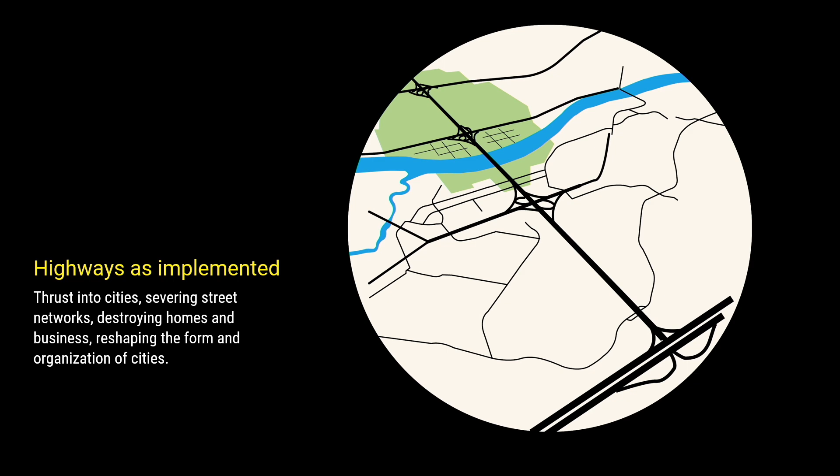The original intention of the interstate system was, as this image shows, that the interstates would link cities together, but would not route through them. Instead, the highways would stay on the periphery of the urban environment and diffuse into the local street network, being context sensitive to the area the streets were in. But as we know, that's not necessarily what happened. As implemented, the highways were built on the outsides and into the cities, creating massive interchanges, huge land needs, and severing and destroying thousands of neighborhoods across the country.

Well, what happened? Dwight D. Eisenhower, who signed the Interstate Highway Act into law, later regretted part of the decision. He said that was against his original intent. He went on to say it was against his original concept and wishes, and did not love that his name was attached to the legacy of the interstate highway system.

But, as we know, the highways were built. So, what happens now? No city was left unchanged by the interstate highway system. City images were changed, city form was changed, the nature and relationship between land use and transportation was forever changed. But today there's this opportunity, and it's called highway reimagining.

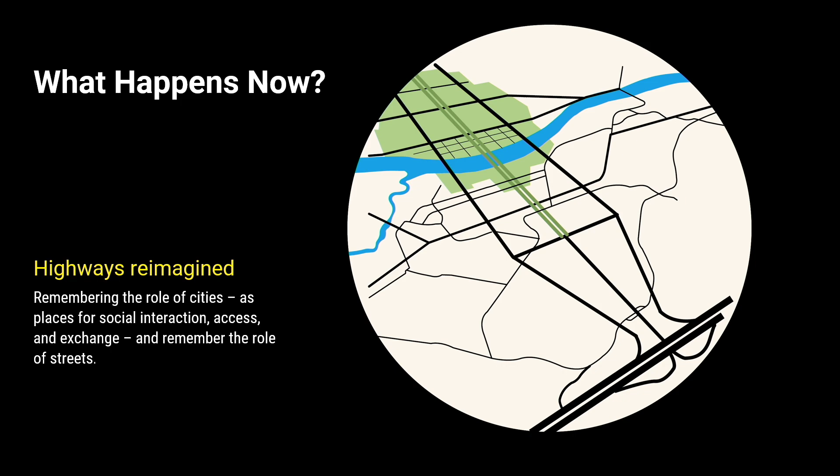So what happens now? Well, what Ian was mentioning, what we do as a firm, is we help communities reimagine highways. And the question presented tonight is what does that look like? This is just a graphic that shows you can rethink these highways as something different, as something context sensitive, that is more closely related to the original intent of the interstate highway system, so that these paths are not just conduits for fast-moving cars.

And it's also important to note that as soon as the highways went into these cities, people have been trying to get them out. The movement started small, but it's been going on for decades, and it's gained success and had a lot of setbacks.

I think, Ian, you've personally been involved in about 35, 36 different highway reimaginings around the country over the past 3 decades. So Ian's had a hand in a great many of these.

But for many of us, the moment came here with the Every Place Counts Design Challenge. That was the US DOT in 2016, the final year of the Obama administration, had this design challenge that happened in 4 cities to help these communities reimagine what the highway had done to bifurcate their neighborhoods, and ask the question, how could changes be made to reconnect those communities? It was the first major admission by the US government that highways actually did harm to these communities.

And what was also going on in the background for several years of advocacy work is an organization that I used to work at and was involved in, the Congress for the New Urbanism. They have been tracking highway removals for the better part of 2 decades now, putting out a biannual report, Freeways Without Futures, that lists the top 10 highways that need to go in the United States. But they've been tracking these efforts since the 90s.

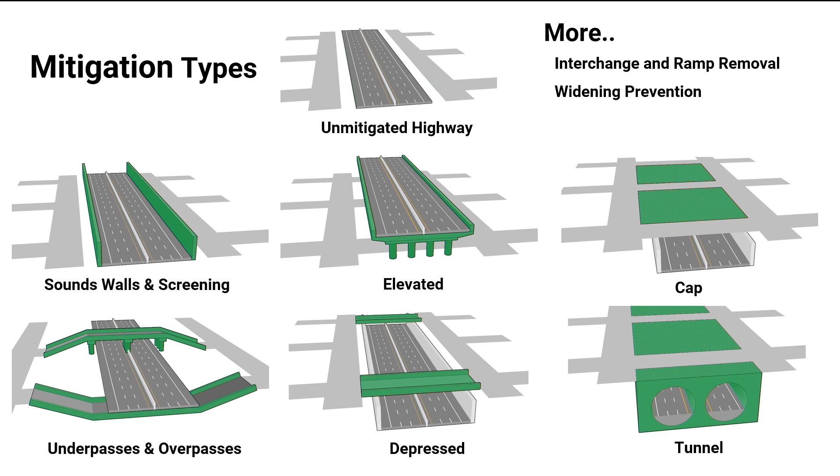But I think it's critical to know that the answer to the question of is it removal or is it mitigation is: is the highway still there? Because if it's still there, it's just mitigated.

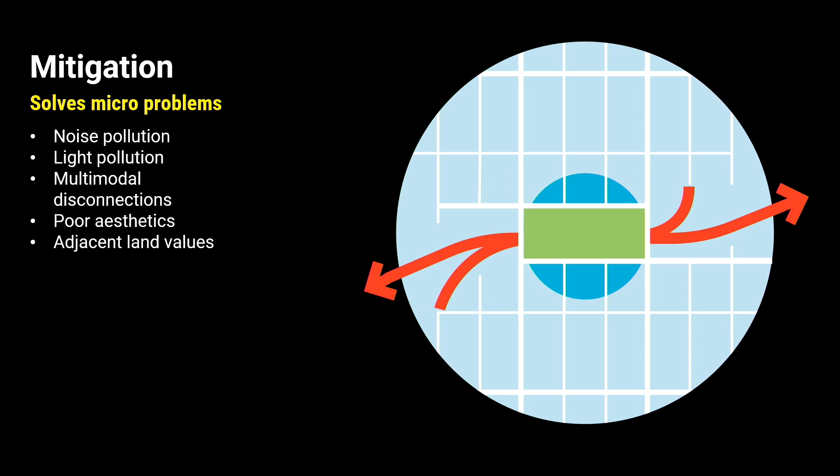And why is that important? Well, mitigation solves micro problems. It solves problems just in the small area in which the mitigation is happening. Those include local noise pollution, light pollution, maybe disconnections for bus and bikes and peds. It might fix some aesthetic issues and might help increase adjacent land values, but you still end up with a highway on either side of the mitigated issue.

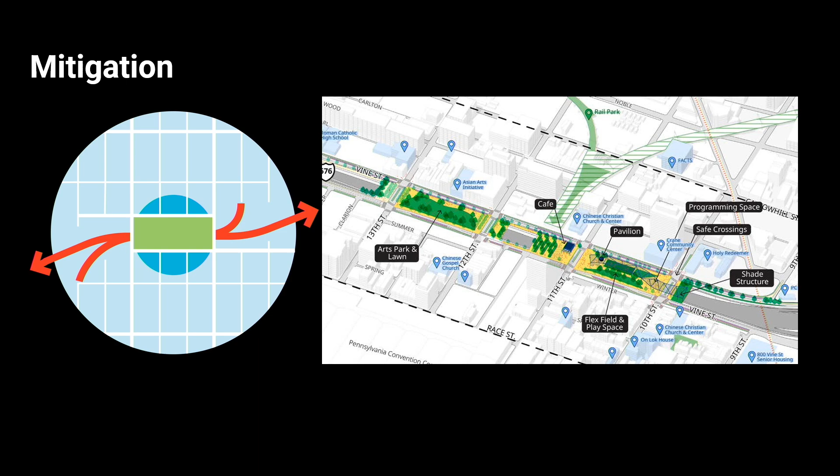So that can be great in certain places. It's not generally what we advocate for. That's what you're seeing here with the CAP in proposal for the Vine Street Expressway in Philadelphia, if any of you are familiar. But removal or reimagining the highway goes several steps further.

It solves macro and micro problems. So what that does is it changes things like city form and city image. What does your city, what does your borough, what does your town, what does your community want to be? Removing the highway, reimagining what it can be, can change the entire image and trajectory of a place.

And I want to give you a few examples. So this is Rochester, New York.

You're going to hear several examples tonight. This is just one. The removal of the inner loop dates back to the 1990s. It was actually written into the 1999 comprehensive plan, the Renaissance plan for Rochester, New York. They understood that the traffic volumes on the highway did not necessitate the need for a highway, so they put it in their plan. They said, we are going into the 21st century, it's 1999, what do we want to be? We don't want this here anymore. So they planned. They didn't have the funding, but they had the idea.

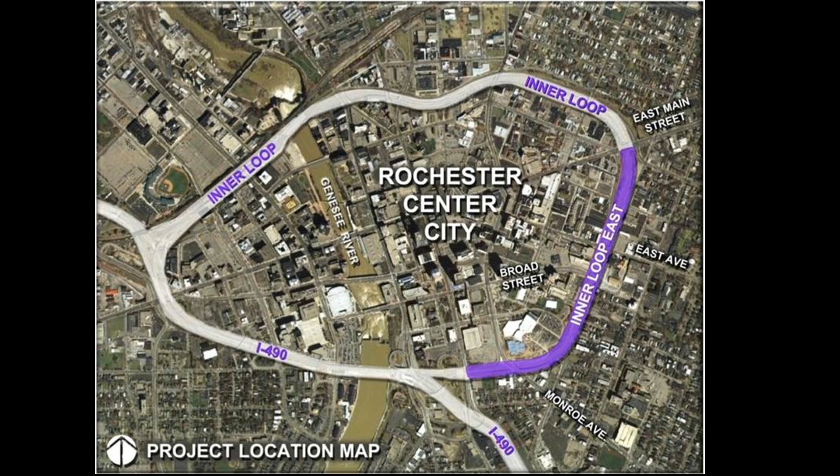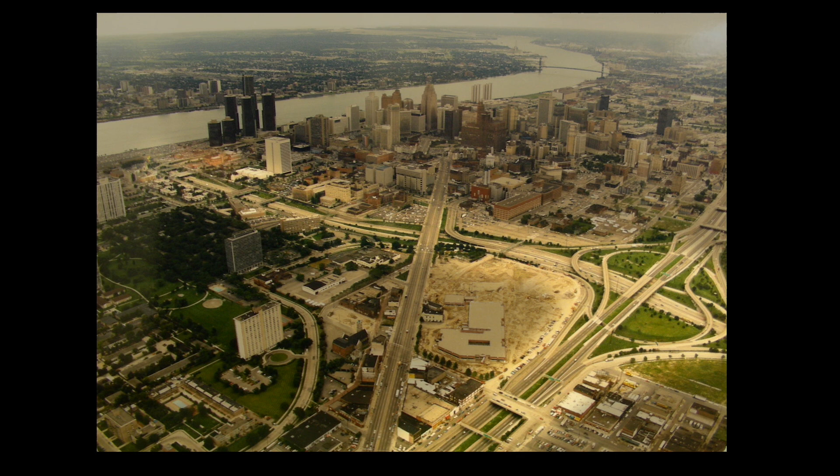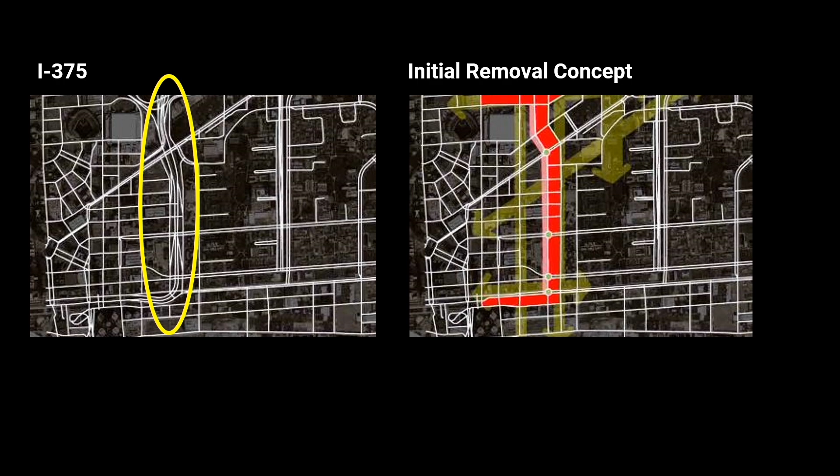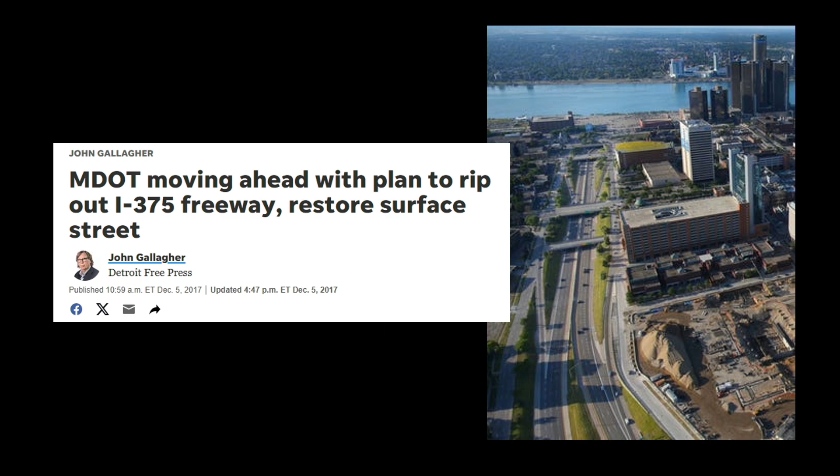And the idea to remove this stub of 375 and restore the relationships started to become popular. In 2017, the Michigan DOT heard the cries of the community saying we want something done with this, and they decided to move ahead with ripping out I-375 and restoring a surface street. And it's important because this is all happening in the backdrop of Detroit coming back, the vibrancy of the city being restored. It's seen this major renaissance because it's doing all the things it had done before the highways went in: investing in people and places, transit, art, multimodal connections, joy, and health.

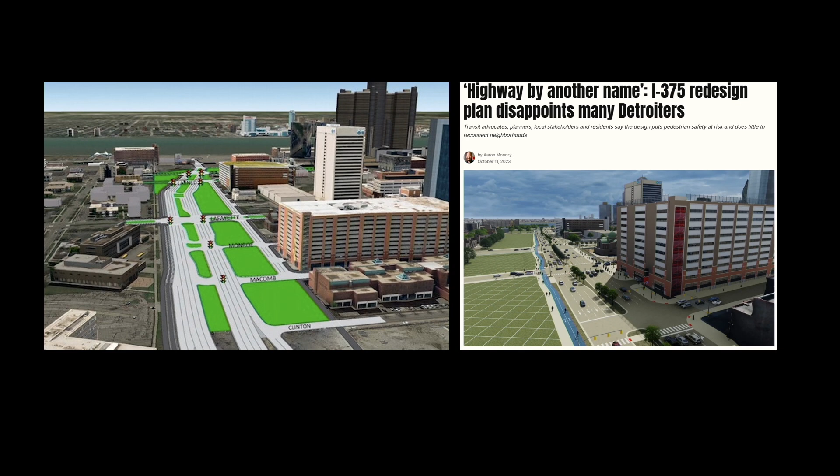It's not all great. The plan by the DOT, imagine that, a group of engineers planning, taking out a highway, they still didn't quite get it right. The community was pretty unhappy with what the city of Detroit, with the Michigan DOT had put forth. Some quotes from concerned citizens: What happened to restoring Hastings Street? They're replacing a highway with a big arterial road, which is also a barrier.

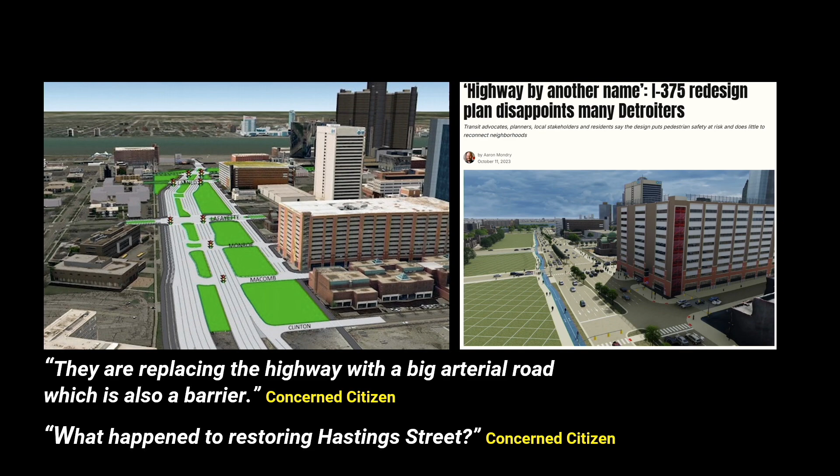But there's something to be said about applauding the DOT. When your dog quotes Shakespeare, it's not correct, but it's not cool to correct his grammar. So it's a major admission that the DOT is doing the right thing and removing this highway and allowing the communities to reconnect and reimagine a different future for the city of Detroit.

And in fact, we have been helping them with a peer review of their plan to make it even better and to hopefully produce better outcomes for the city of Detroit. And one of the last things I'll say is this is all happening in the background of, remember how I mentioned that the US DOT made this admission that highways were a problem?

Now the US DOT has something called the Reconnecting Communities Pilot Grant Program, which maybe some of you have heard about, and they've pledged over $1 billion for highway reimaginings and similar efforts to reconnect communities and address the barriers caused by infrastructure. So there is money behind this, there is backing by the federal government, there is this understanding that now is the time to be thinking about reimagining these spaces.

Before I pass it over to Cindy, what I want to say is that the decision to reimagine 322 is not a technical feasibility issue. We all know it's hard, and we know it can be done. It has been done, and it's going to continue to happen in communities all across the country. But also, just like those other projects I shared with you, it must be a community-driven decision. So I'm going to pass it on to Cindy.

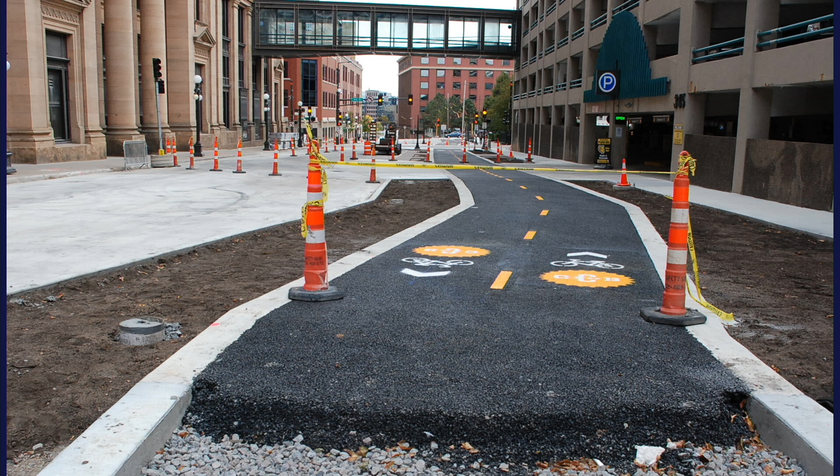Certainly there are reasons they were doing that, but it was really a bummer to me because it really completes that trail for me. It certainly has a function. It's actually a structural detail to keep an asphalt trail from sloughing or eroding at the edges, but it also adds to the feeling of completeness, to the placeness of that trail. It's still largely a place to move through, but the feeling feels different. A typical trail feels a little quick, kind of slapdash, but when we add that detail...

That was the idea behind Path as Place. It was a powerful experience to me in my work as a landscape architect in transportation and mobility, and it led me to this idea of Path as Place. I think we can define any path, a road, a street, a trail, a track, a highway, even a route, any linear feature, as through its design and composition, is all or part of a place - a defined area, a location, or a space within a built or natural environment.

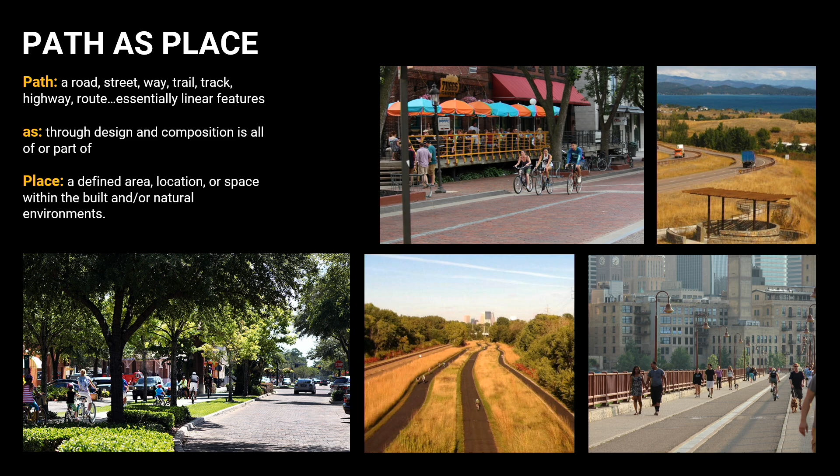That's the idea behind it, and it's been helpful for us as we work within communities to talk about it in that space, because we all know and love places in our communities, and it's about bringing that sort of sensibility and attention to detail, even at any scale, so it happens when you experience it. It can happen in a variety of scales and different contexts.

This old elevated rail becomes a place in New York. If you've been here, it's a wonderful experience on the High Line. Bikeways through, again, detailing - this one's profoundly memorable, as is this one. Again, just that sensibility to really crafting the space.

Even a highway - I'm not suggesting this for 322 at all, Ian will share some great ideas there - but this highway, Paris Pike in Kentucky, becomes a scenic and memorable experience because of how the paths, the road, work with the topography. They respect the landscape and capitalize on the view sheds. Certainly not appropriate for your context, but I think it's another example of a path as place.

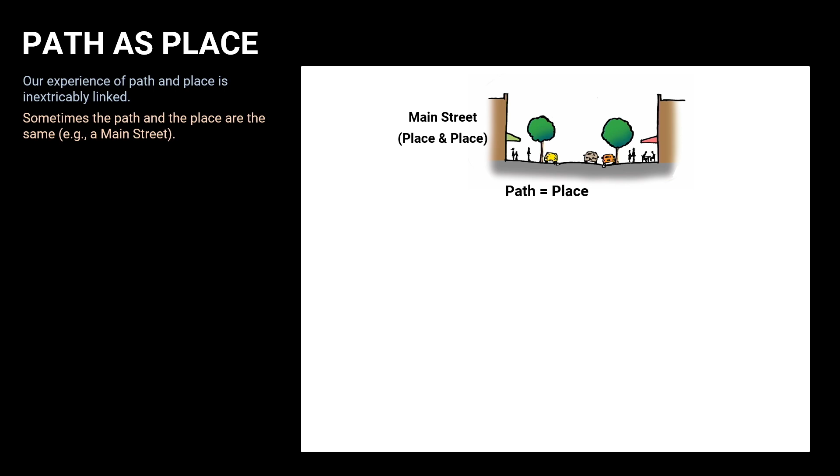So generally what we often talk about is our experience of path and place are really inextricably linked. Sometimes the path and the place are the same, such as a main street. These are some fun cartoons that Ian did for this idea. And sometimes the path really contributes and supports its place, a street in a downtown or adjacent to a parkway or a waterfront.

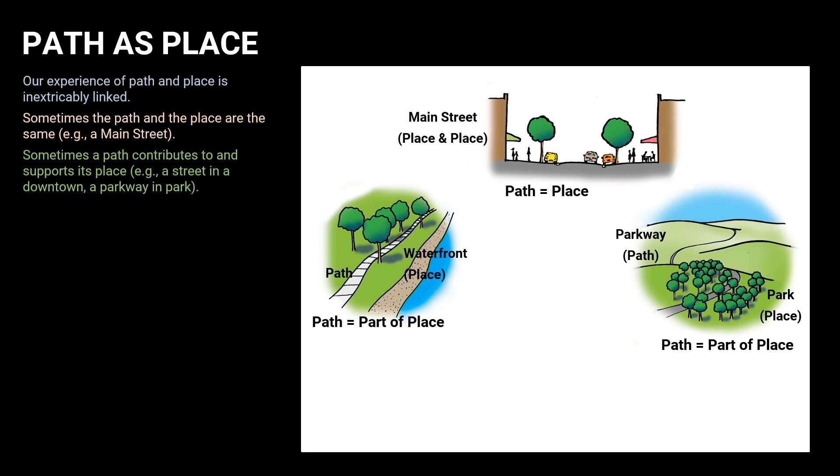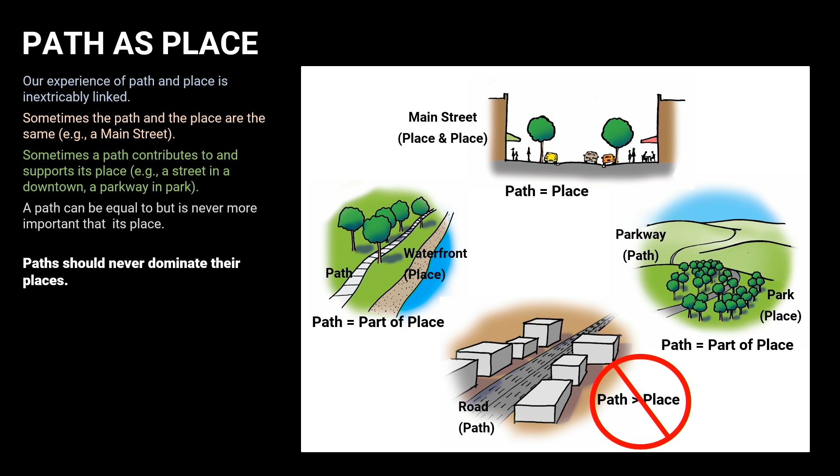A path can be equal, but is never more important than a place. As we see in the bottom, it should never dominate that sense of place. And when it does, it really deteriorates the sense of community and that sense of enjoyment in that space.

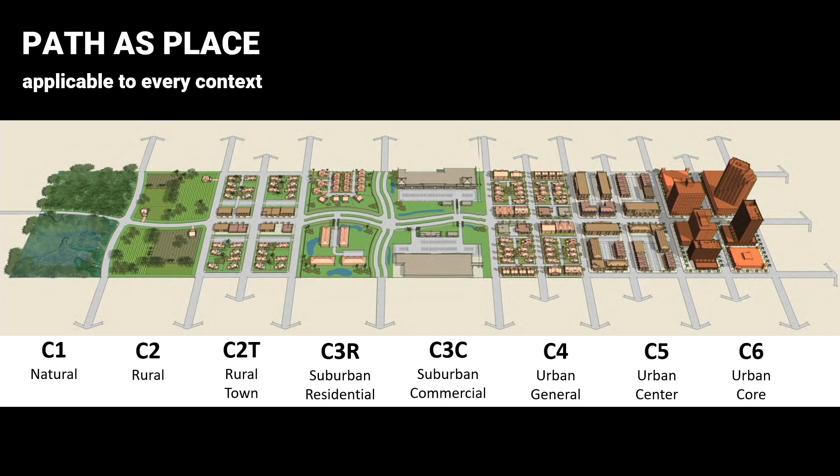It's certainly applicable to every context as well, so it can grow from a real urban idea to a natural one. Of course, that's going to look different - path as place is going to look different in different contexts. So how can we design, not engineer, the right solution here? I think it doesn't mean engineering isn't part of the solution, but that we need to work together. I don't think there's a singular discipline that has the solution, but rather it comes from an approach.

And if we conceive of the context as place, we will design these spaces differently. I actually came across this article not long ago - Dan was a part of this. If you haven't read it, I really recommend it: Roadways and the Land, the Landscape Architect's Role. This was actually from the year 2000, but it so resonated with me, and I wanted to share this aspect.

I do think the role of the landscape architect is perhaps a missing link in the current solutions. This article goes on to say that landscape architects must develop well-defined aesthetic rules to complement the very well-defined structural and engineering rules, and this is certainly likely true. But I'd also offer it's about an approach, how we as landscape architects think about space.

There are three components I'd like to share with you about how we think about space and what might happen with 322: the ideas of curation, of culture, and of choreography. The idea of curation is the act of forming an experience through the selection and organization of elements. Think of a museum experience, a park space you love, even the grocery store - these experiences are highly curated for you to have the right experience there.

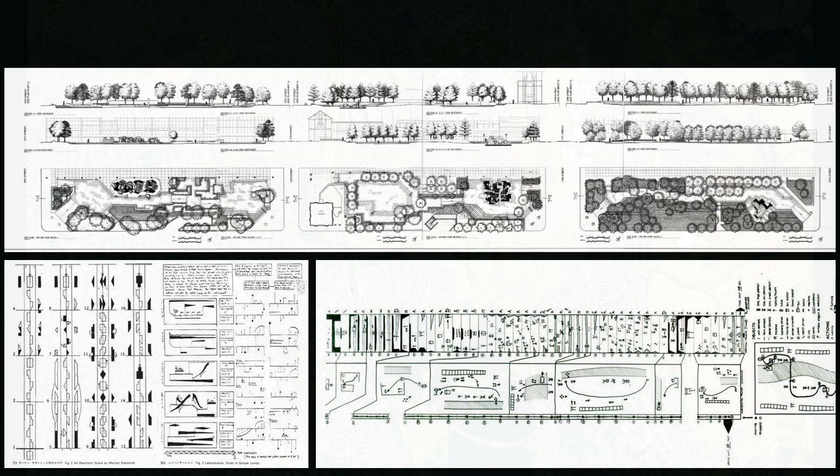I think for a transportation project, these are just fun diagrams by Lawrence Halprin, landscape architect that I love. He designed this space up above, but sort of talking about the sequence of space and the kind of idea of how he wanted people to experience his landscapes. And I think it was a real nice rhythm that he created. His wife was also a dancer, so I think he was very inspired by her as a choreographer as well. So something to think about in your space: how are you choreographing that along 322?

The last thing I'll do is share with you a project we're working on. This is near my neck of the woods out in California. You can kind of see, there's a highway here. And you can just see they really, really wanted to connect this all the way over to a highway here, and Caltrans started to buy up this land. You can see actually where they're going to put some interchanges here.

The city and the community really fought that, but they had already purchased some of that land. It's been sitting like this for years, many decades, since Caltrans started buying up the land, and they've actually now given the land back to the city. It was homeowners who lived here, but now it's back to the city, and so they've started to develop this parkway concept. We're working to help them reimagining this space, and this is the parkway here that they're going to connect. Perhaps debatable whether it's the right solution, but I think what I want to mention here is that it is going to connect to two parks. A parkway was originally meant to connect two parks and then have a park-like experience through it.

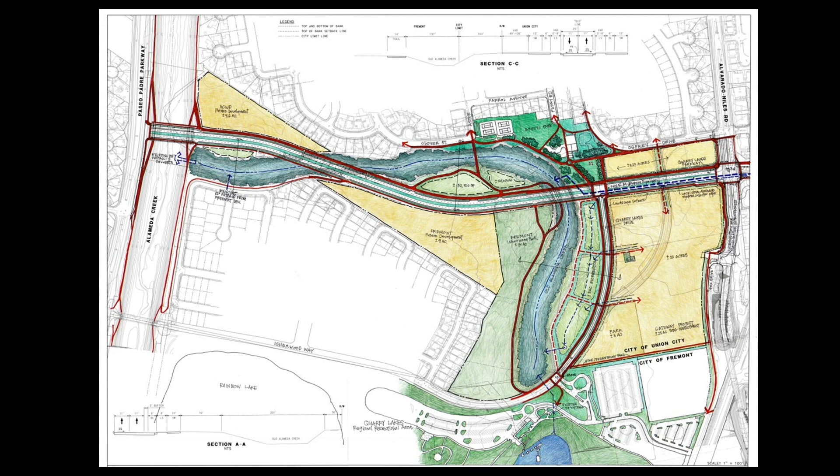So in this instance, creating a parkway versus a highway, a much smaller road leaves such wonderful opportunities for other things, like creek restoration. We can address water quality in this, future housing opportunities that we are sorely in need of, multifamily housing in that area. So it really has presented a wonderful opportunity. If this had all been an interchange, it would be a really different experience for this community. Another way to look at it, in cross-section, is how we're allowing for multiple functions in this space: a wonderful creek restoration, places to inhabit, and transportation certainly is within this.

Mobility is within it, but it's not dominating the experience. The parkway over here is not a barrier.

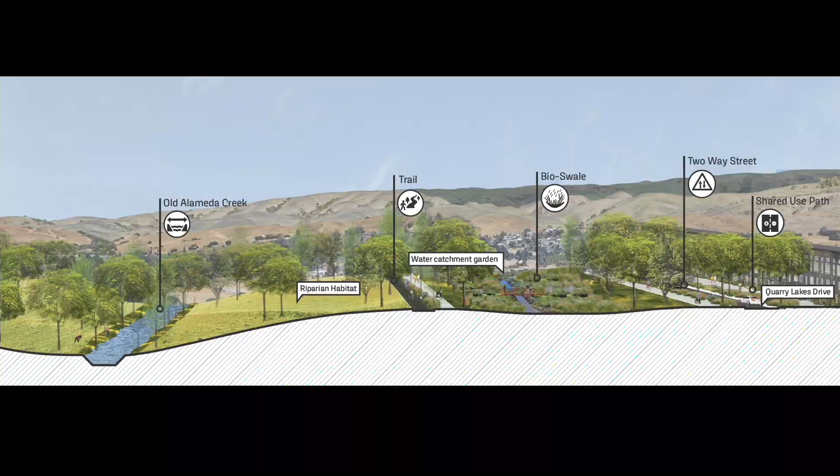So this is what it sort of looks like in some of the renderings. We have been really focused on the design of the trail system, which in this one looks like it just goes straight as a bullet, but actually comes through and meanders into some of this area. And then some of these other spaces, this restoration, creek restoration, and also the park spaces along it.

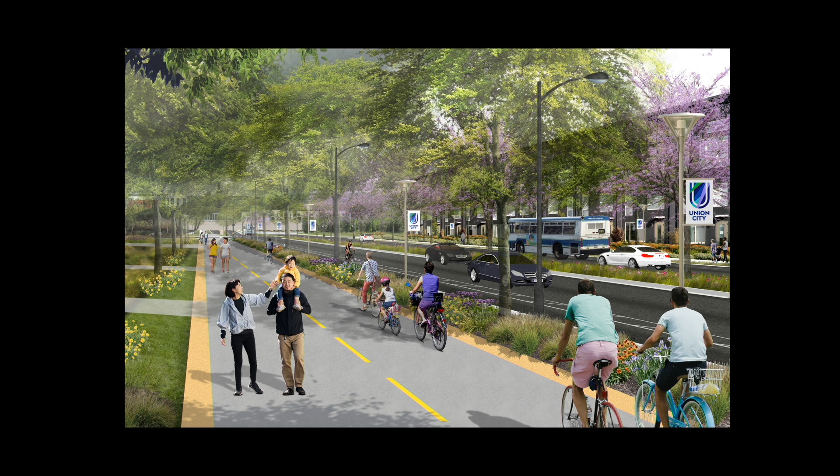And the transportation system is certainly part of it, but walking and biking isn't an afterthought. It's not just accommodated, but it's celebrated.

So another quote from that wonderful article that I mentioned earlier, and I think this is really an important one. Three mentalities should be gathered around the drawing board: one should be creative and aesthetic, the second analytical, and the third technical and practical. If these three mentalities do not exist in a single mind, they must always be present in terms of absolute equality in the group or team responsible for design.

And I think that's so critical when we're thinking about our roadway systems and how they really work within our landscapes. So I would offer an addition to Alex's thoughts. As he mentioned, we know it's technically feasible to reimagine some of these highways, but it must be community driven. And if that path-as-place approach were employed, what would the solution be? So I'll hand it over to Ian.

Thank you, Cindy. Okay, so what I'd like to talk about is both the part of 322 that's in town and also the rural part to your east.

And I'm going to start with some stories from other places where we work. I'm going to go over the battle we had over Virginia Route 50. This was my very first highway reimagining project, which started in 1995.

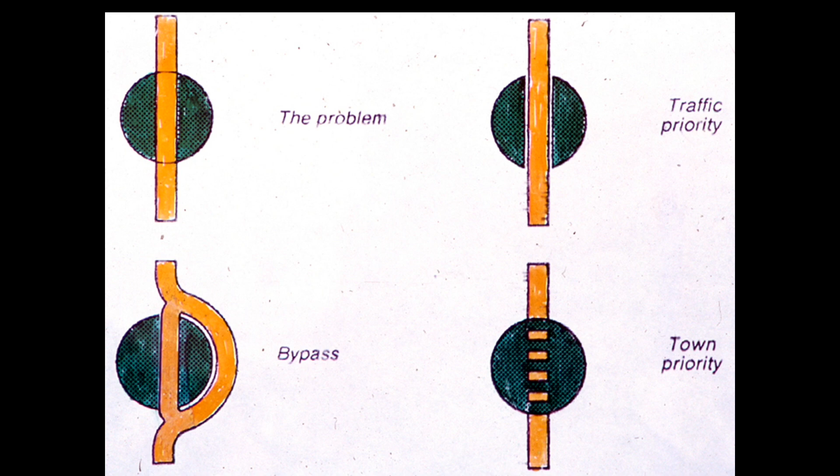So we suggested this, the community and I, to the DOT, and there was this oversized negative reaction against it. It was not just no, but they were viscerally saying no, absolutely not, you have to have a bypass. We were wondering why, and we kept pushing because it seemed like a really great idea. It works all over Europe—for about 20 years it would work here.

What we learned was that the DOT wasn't there to help the three little towns with the safety on their main streets. They needed these bypasses because there was a plan that wasn't public to build a giant freeway from Washington to West Virginia, and it happened to go down Route 50. They needed the right-of-way. That's what this was about. It wasn't about safety, it was about building this giant highway that Senator Byrd from West Virginia had championed.

His economic development plan for West Virginia was to build this giant highway so that he could build tract homes, low-density suburban homes in West Virginia, and that would help his economy. People would then drive all the way through Virginia to get to work in Washington D.C. every day, morning and afternoon. That was his idea of a great idea.

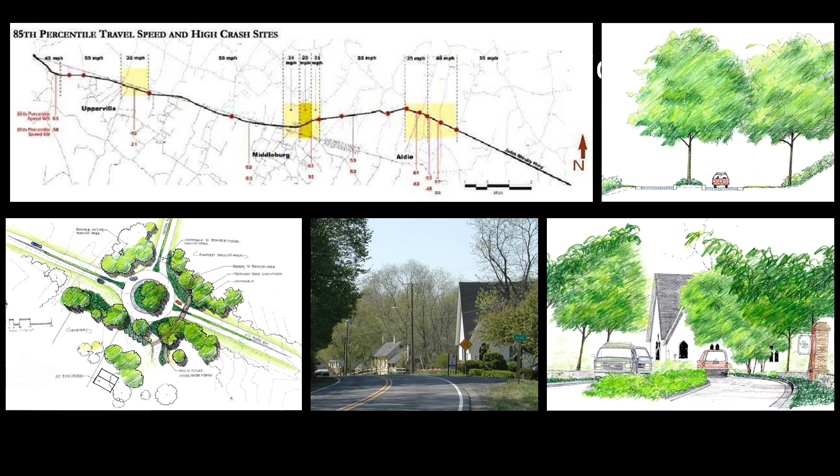So we'd preserve the rural road and have town-friendly speeds when the road got to towns, so that the towns wouldn't get divided. Different cross sections: this one was for where there was a left turn, so we developed a beautiful median with an opening so people could turn in and keep the aesthetic and the look that everybody wanted. This was one of the main towns with an entry sequence at each end and a slower speed through the town.

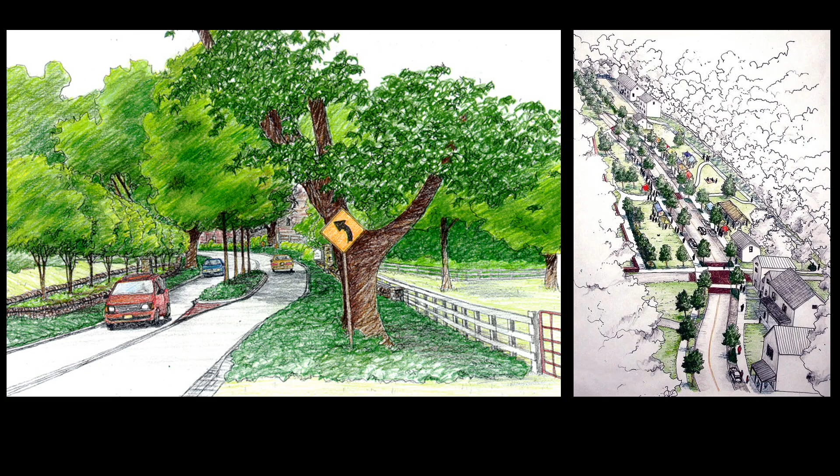So all of these plans came together, and the fight continued. It was a vicious fight. We got federal funding for this, and they did everything they could to kill the funding, to use it for other things. It lasted for years, and we eventually won.

But it wasn't a technical decision, and Alex went over that a little bit. It was political. Eventually, because the DOT could not say yes to the community, because they were charged with building this highway. So it didn't matter what we said, they had to keep pushing their agenda.

And it eventually went to Senator Warner in Virginia, the older one. Some of you might remember him, he was a very powerful senator. Also Senator Graham in Florida helped support that, because we were doing another equally cool project in Florida at the time. And so they decided that the giant highway was not happening, and that this context-sensitive landscape preservation project would happen. So 29 years later, the project has been an enormous success.

VDOT now uses it as their poster child for context-sensitive design, and the traffic volumes haven't changed.

This is an important point, because when I arrived on the scene in the 90s, the traffic forecasts were saying that traffic volumes were going to double. They had this modeling that said traffic volumes would go up, and so we had to build bypasses to accommodate the additional traffic. Looking back, the traffic forecast from the 70s said volumes would double by the 90s, and they hadn't changed. The 80s forecast said the same thing, and we weren't halfway there. So we figured the only way the traffic forecast could occur is if the highway was built.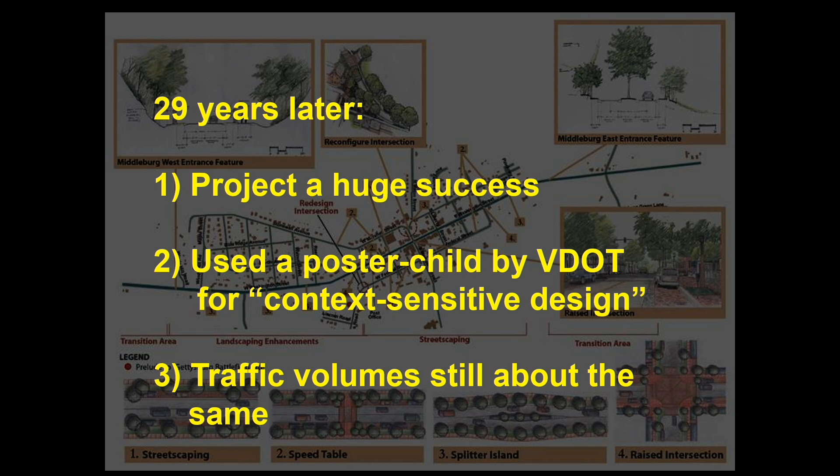It should be your vision, because traffic demand forecast models are only one version of the future. If you decide to lower your traffic volumes, you can, by making changes. I want to guarantee to you tonight that traffic volumes are not an incompressible fluid in a pipe that has to go somewhere. They're malleable. They can go up depending on what you do, and they can go down depending on what you do.

So this is another project, in Chattanooga, Tennessee. This is the river, that's the downtown, and they were trying to revitalize it by building an aquarium. But the downtown wasn't very walkable. They thought, hey, if we build an aquarium, people will come downtown and stay for lunch. Well, people would drive downtown, go to the aquarium, and then drive out. It wasn't a place. One of the problems was they weren't connecting to the waterfront, this lack of connection.

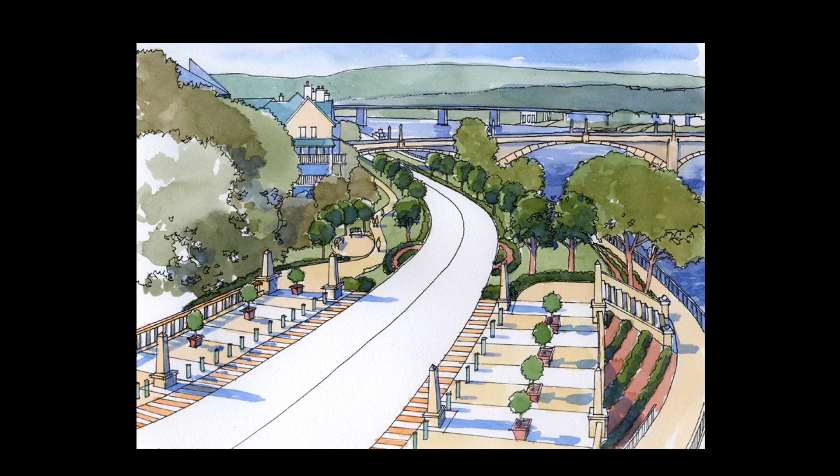So we thought, well, why don't we just change that big road into a 2-lane street and create steps down to the waterfront, and that would really help the downtown have an address.

Now, the Tennessee DOT at the time — they support what happened afterwards, but at the time they said, hell no, you can't do that. The city's lifeblood is the highway, and the mobility it provides is so important for the economic health and convenience of the motoring public. We have to fight congestion, so we shouldn't take the lanes away. We should add lanes, because removing it is simply anti-progress.

And the city, the community, was saying that walkability and access is more important, and that's key to the economic and social health of the city. The highway is context insensitive. So two completely different paradigms, two different ways of looking at the same situation. I'll go into that in a little more detail later.

We reconnected this access-managed street, and now the downtown is more connected and more vibrant. Other investments have come. There's more jobs, people, activity, and social and economic exchange happening today than ever before. Now the DOT supports the project. And if you ask anybody if they want the big road back, cutting up the waterfront and creating a barrier, they would not want it back. But it's incredible at the time how necessary it seems to keep the big road. The city gets better every time.

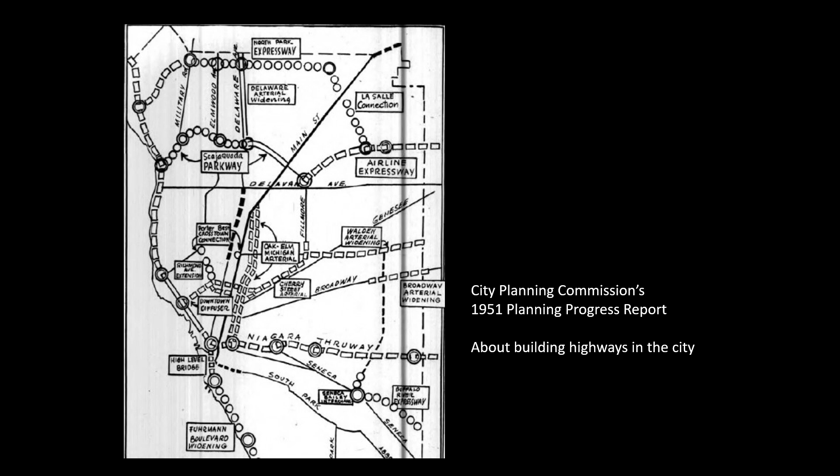This is Buffalo, back in the day when there was no highways in Buffalo. And this was the highway plan, very complicated as you can see, from 1951. I just want to use this one example of a highway.

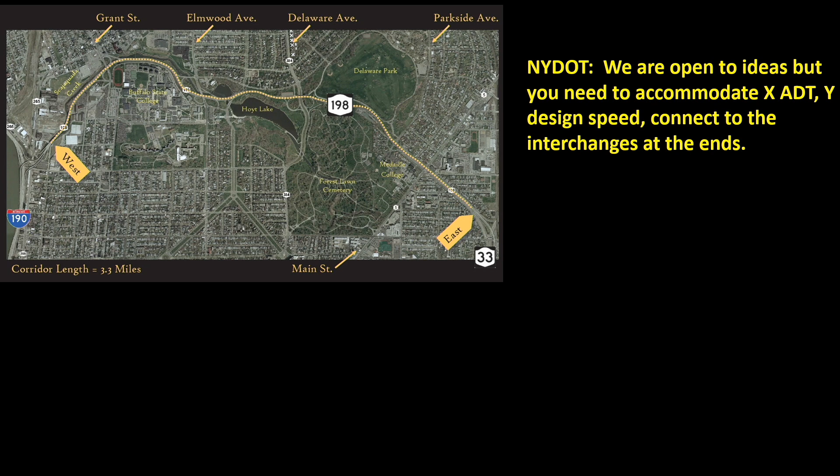A lot of flexibility there, eh? So you have two interchanges. What can you build between two interchanges besides the highway? It brings up the idea of a chimera—like if you want to build something nice between here, you get this composition of incongruent parts that are unrealistic. And so they basically just said you have to build a highway.

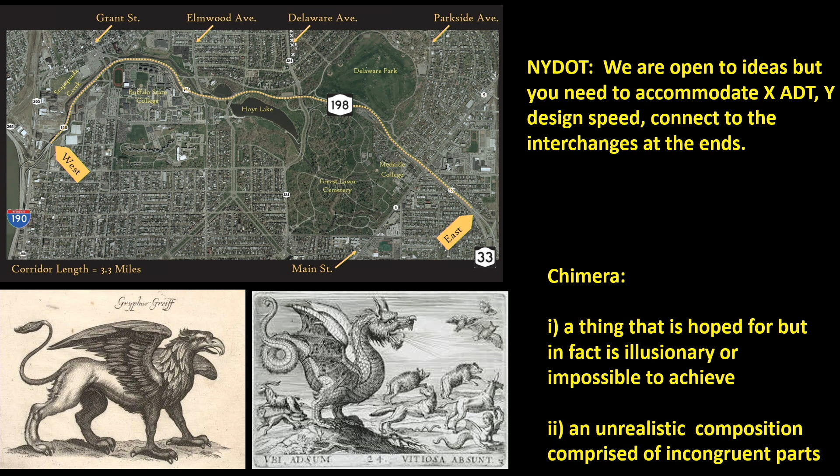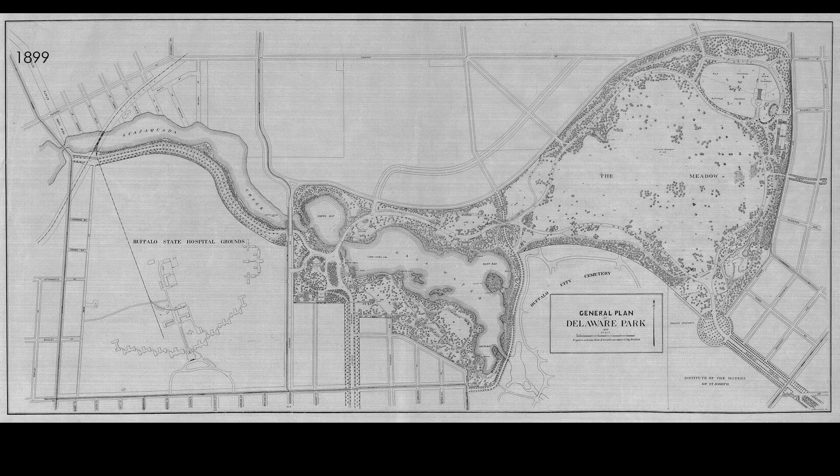And it was not the New York DOT's right to destroy this piece of art that belonged to the people and make this highway system. It needs to be restored and given back to the people.

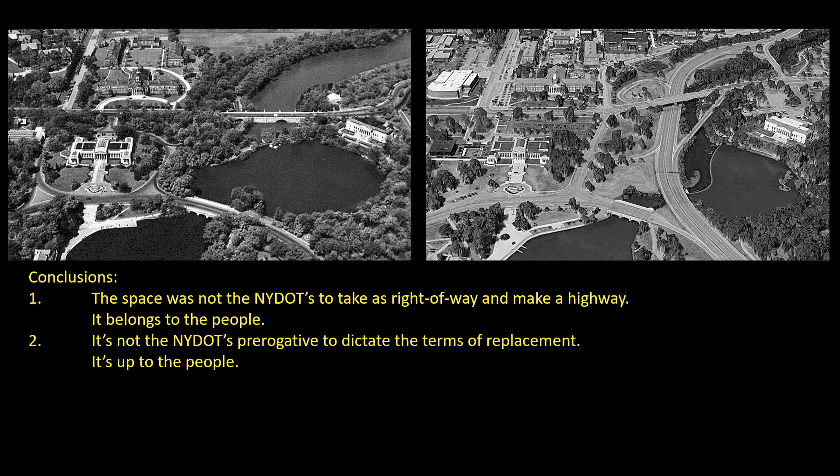We'll take questions at the end, thanks. It's not the New York DOT's prerogative to dictate the terms of the replacement. They should not have taken the art, so they can't tell you what sort of piece you need to put in its place. It's up to the community.

So we recommended removing the highway and restoring the relationships that existed. And what would you put in a park? An avenue? An alley? A highway? How about a parkway? That was not in the environmental assessment by the New York DOT.

So just right there, you know that the environmental assessment wasn't worth the paper it was written on. After we did our public meeting about this, they rescinded their environmental assessment because it did not include a parkway in a park. Rookie mistake, I would suggest.

So what's the context? What's important in this landscape, and whose model should apply? Should it be the interstate builder, or should it be the community? Should it be something to do with parks? How do you approach this problem?

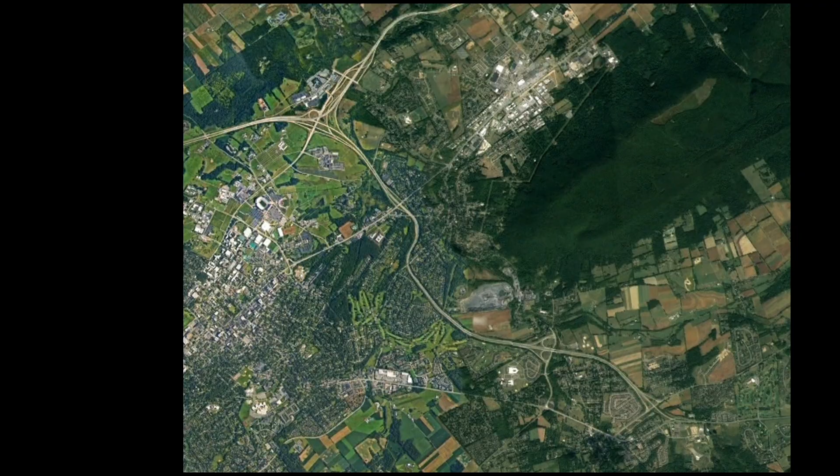So let's talk about 322. That's what it looks like, right at this arrow. Now I have a question for you: are you allowed to walk or ride your bike on this highway? Okay, you can't. Now let's say you could—let's say it was allowed. Would you ride your bike or walk along it? Just shout out a couple answers.

Why not? It's dangerous, okay. What else? There's no room. No room? Too fast? Ugly. Ugly, okay. Hostile, right? Okay, well that's good to know.

Now way over here, on the other side of the 99, you've got this fantastic hotel and convention center and other things there, and it's about almost 2 miles to the middle of State College. Have any of you walked there? I have. Oh, okay, and you're alive.

Okay, great. Has anybody ridden your bike there? Oh, you have too—okay, 3 people. How was the experience? Was it something that you would recommend for your mom? It was a secretive farm road under the highway. Okay, over there. Okay, so it's not pleasant, right? It's not a nice thing, even though it's so close.

And these are the traffic volumes. The busy part's 39,000. Up here is 28,000, and it goes down to, in the rural area, only 17,000 cars a day. And this reminded me of my bike ride.

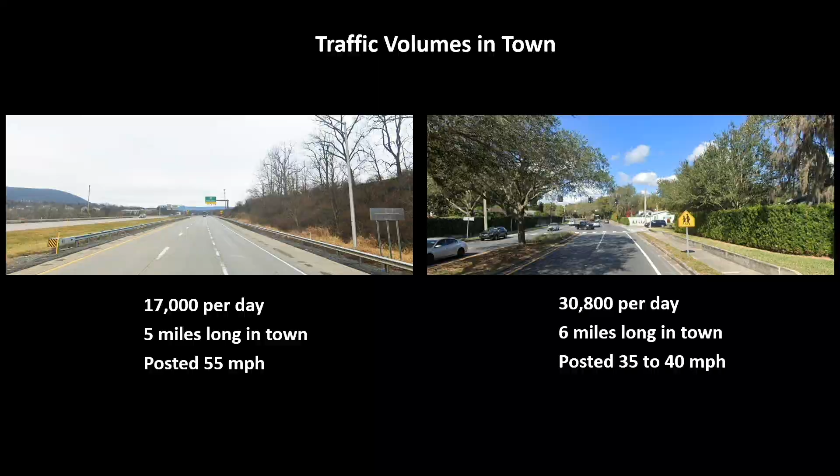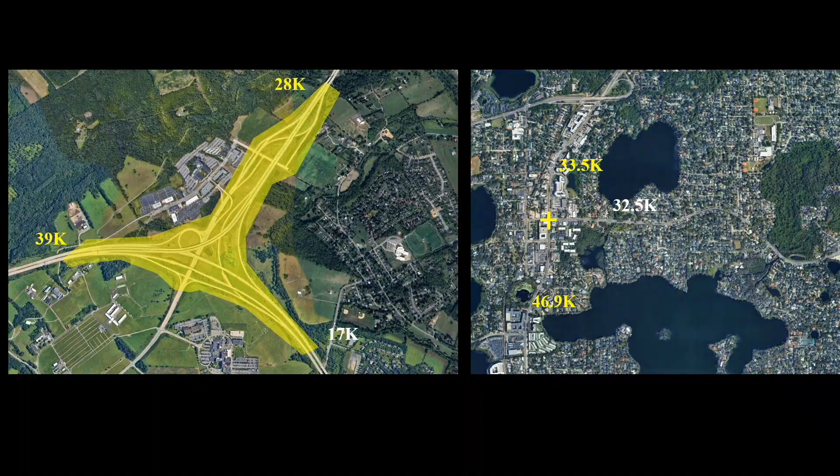So let's take a closer look at this unbelievable interchange. Like, that's unique.

Let's pretend it's not there, and we're going to start again. Let's say you put 99 in on the exact same alignment, and we're going to recycle all the bridges, so it doesn't cost much. You could achieve the same thing with the same volumes with a parkway and a connected little network of streets. You still have a couple ramps on and off, so you can get on and off to go anywhere you want, but way simpler, way less land, and you can connect to the development over here in the neighborhood and so on, because there's already bridges there.

And you could probably make another connection down to the football stadium, for game day or whatever, or other purposes. So you can get more connections because you're not on an access managed road. And then you could do a trail system connecting your existing trails and make a very comfortable walk or ride through your community, which you can't do today.

There are people who drive between two land uses which are a mile or two away, and they have to use an interstate and a highway to do it. Like, that's ridiculous. And it processes more traffic.

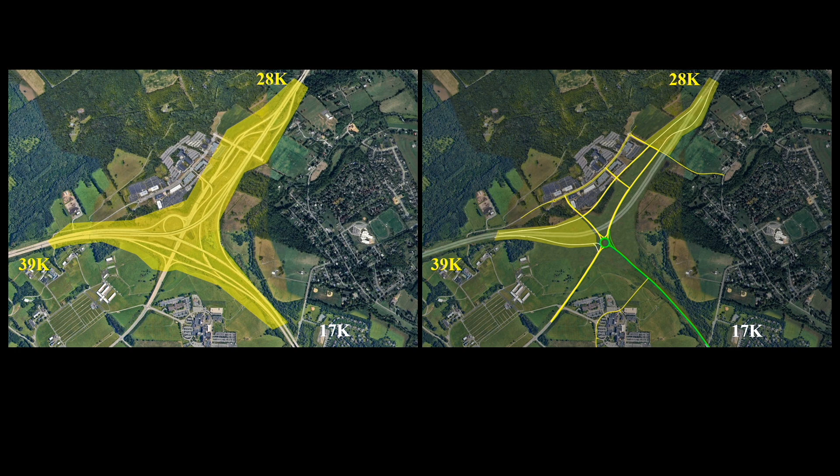Now, this is the blast zone, because you still have a couple ramps since you have 99, but look at the relationship with the land. This could be parks, it could be development, it could be all kinds of beautiful contributing things, and a lack of a barrier.

So let's look at the broader picture. We just talked about how we could simplify this and make it into a more contributing place. The same thing can be done at these other locations as well, and there's lots of different ways of doing that.

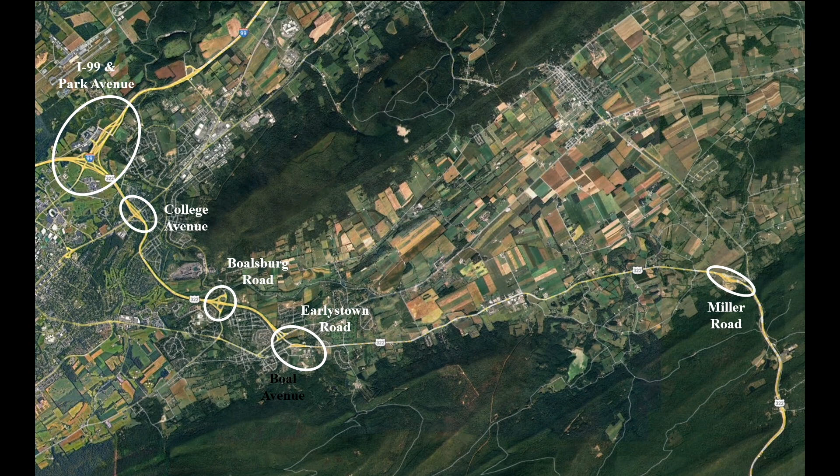And then at Miller Road, this is not a very elegant transition between a highway and your beautiful landscape with your rural road. So this is the city developed, it's topped the highway, and it's going to continue to do that.

There's 3 places to access the highway. The place is going to grow, and you've got a highway here and a highway here. Just like in Buffalo, you've got 2 interchanges pointing at each other, and the New York DOT really wanted to connect them with another highway.

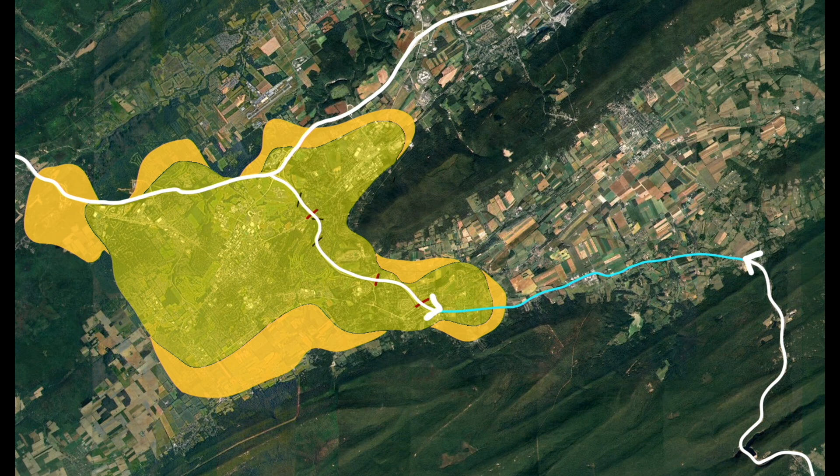So this idea comes from the 1950s by people who had no experience with the effects of highways on communities and landscapes. That wasn't a thing back then. So we're living with a predetermined outcome of getting an interstate through here. But now we know we don't have to do that. We have choices. There are examples around the country of not doing that.

So what we call that part of 322 that attached to 99 is a spur. What we are suggesting is to reimagine it. You don't have to have that barrier in your community, a low-performing street in terms of connectivity and multimodalism in the middle of your community. You could replace it with something very simple that can carry more traffic, can be more permeable and higher performing

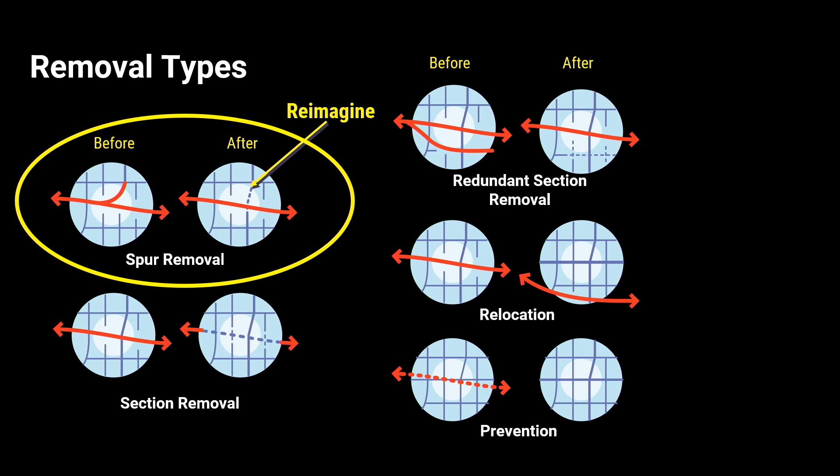at a lower cost than keeping that overly fast highway in your community that you can't even walk or ride your bike on. So we would suggest reimagining that. And that shows a commitment to context sensitivity through this corridor, through the town part and in the rural part, rather than the likelihood of just waiting another 10 years and trying to build the interstate, and then another 10 years more, that preoccupation with finishing that 1950s idea.

That would go away permanently for maybe 100 years, like your vision might say. So here's a couple of thoughts I'm going to add to what Alex and Cindy said. I would not allow, if I were you in your community, I wouldn't build an interstate. I think if you build an interstate through your valley, it's going to, in my view, destroy your valley, its aesthetic, its noise level. It's going to have a couple of interchanges which will focus all your valley traffic on a couple of spots, and your character and your history will be destroyed, just like it would have on Route 50.

It doesn't fit. It fits here. So that's, you got to look for a good fit.

A 2-lane parkway could contribute to the place, as a thought. So if a parkway is not a serious alternative, then there's something wrong with the planning. Just like in New York, whoever's coming up with the options for this idea, if it doesn't include a 2-lane parkway with left turns at key locations and maybe roundabouts at busy intersections, you need to question the EA, because it's incomplete.

I don't know, maybe something like this. Maybe you would probably want your farms reflected. This is just a parkway elsewhere. You can see the path here for recreation, but something beautiful, something that actually adds even more so than the road. I suspect the road that goes through now is on the best alignment because it was put there historically for probably sensible reasons, but something like this would make the place really, really beautiful.